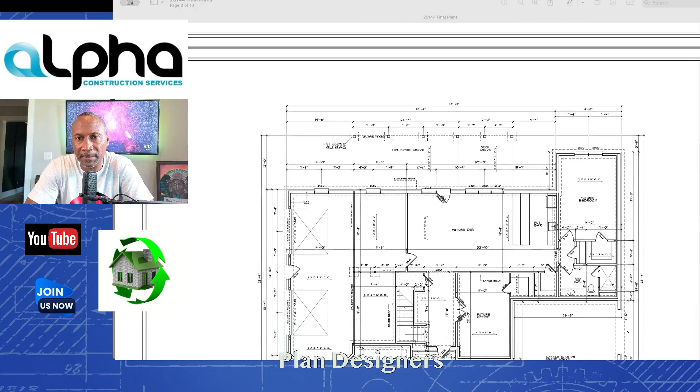We tweaked it a little bit more to make it usable, but everything else, we've actually been through the house. We know what it's going to look like. This house has been built several times before I built it the first time. I know how everything's going to lay out in this home. If we go here, the footings and things of that nature, man, I can see this stuff, man.

There's no guessing, guys. You can probably see it right here — this guy's giving me the directions, because in most cases, we're going to do dimensional flooring, dimensional lumber, because we're trying to save costs. If you do engineered flooring, you're probably another $7,000 to $10,000 more. But I'm trying to save that homeowner a little bit. I can go to regular dimensional lumber — that's been proven to work for years.

Now, if we want to just switch over to an engineered system, we can. But here, it makes it much easier for everybody. When I send this to my lumber guy, he already sees the directions of the joist spans. They don't have to guess about this stuff. Because my joist layout — this guy's telling me which direction the joists are laid out.

Which also, as a builder, I have to go check the code to make sure he got that right. But when you send this to the next guy, your lumber supplier, they don't have to try to figure out or engineer which direction your joists are going to go in and all those things. They kind of already know where it goes, in the event that I'm having it engineered. And then they can do their red line set of plans off of these plans.

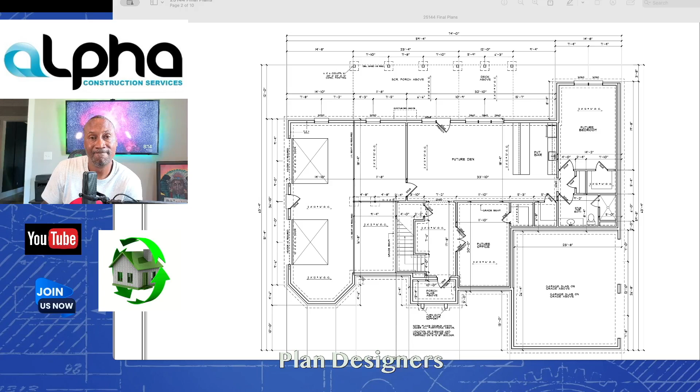This is basic, guys. We don't have a lot of color. I mean, even on the front of this right here, guys, there's none of these pictures making it look pretty and stuff. No, just black and white, man. This is all I'm dealing with. And guys, builders are very direct, man. We're straight to the point. This is what we want to see, guys.

And as a builder, I mean, I can see all the footings. He tried to give me as much layout as possible without making it too confusing. He gave me all the callouts. Guys, you can kind of see in some cases right here all the little lines we got here — he's trying to call out the dimensions and things right there, and then he pulls them to the side.

This is what we want to see, guys. I mean, we can see what the footings are going to be, what the grade beams are going to be, what the piers are going to be. You can see the steps, the direction you're going to go in when you're going up the steps. Just very basic, man — we're not trying to get overly complicated. Like I said, guys, if you got me a set of plans with a bunch of colors and pictures and stuff like that, I really don't want to look at all that stuff.

Here's another thing, guys. Let me see — so this is the first floor plan. As you see here, we got coffered ceilings in here. Same thing, guys — not too complicated, but he does give me the joist layouts. I know which direction those joists are going to go in.

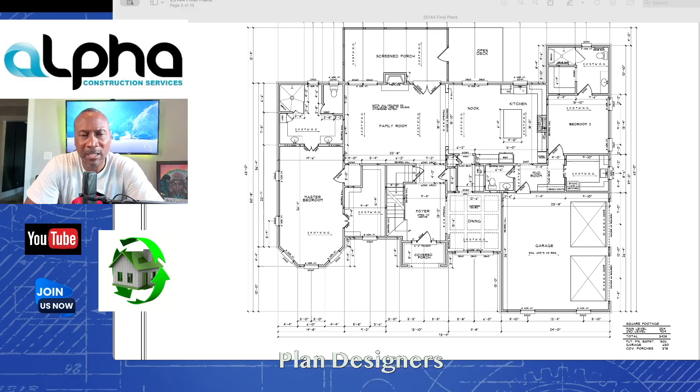So then I can go through, before I even quote this job, and make sure that I understand which direction these beams are going in, or these flooring joists and things of that nature are going in. I can see where the girders are going to be. You go in the basement, you can see where you're going to put the girders in this job right here. So we got girders here.

We can see all these girders, pier beams. It's very simple to me.

Another thing we want to look at, just basic right here. He gives us the details of the square footage that we're going to be dealing with.

See what else? That's one thing. Another thing we're going to be looking at too, guys, these are the elevations. He's doing a call out of all the different material that's going to be done on the house.

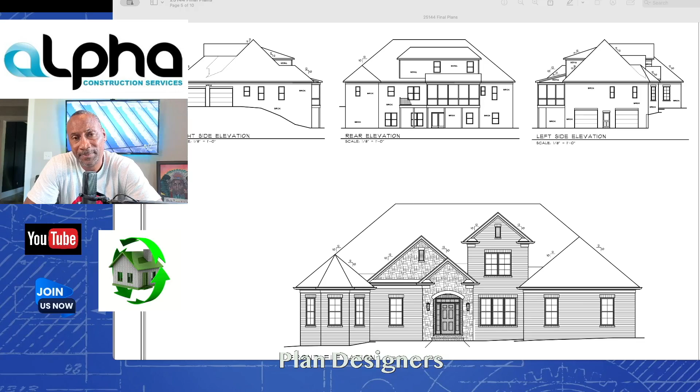This makes it very, very simple for me to upload this information into my estimating software. It's easy for me to upload this PDF file. It just makes it really easy for me to do my job.

He put the electrical layout on a whole other page so you don't have all those electrical lines confusing us. This is what we want to see, guys. Very basic. Then you get down to the electrical plans.

A roof layout is always good so you know what pitches you're going to have on that roof. He called out all the pitches. That makes it really easy for my framers when we get out there and start doing work.

When you see stuff like this, guys, it allows me to hold everybody accountable. I can hold these guys to it - hey man, you got this pitch wrong, or this pitch is less than 2-12, so you got to make sure you put the ice and water shield or another underlayment under that roof.

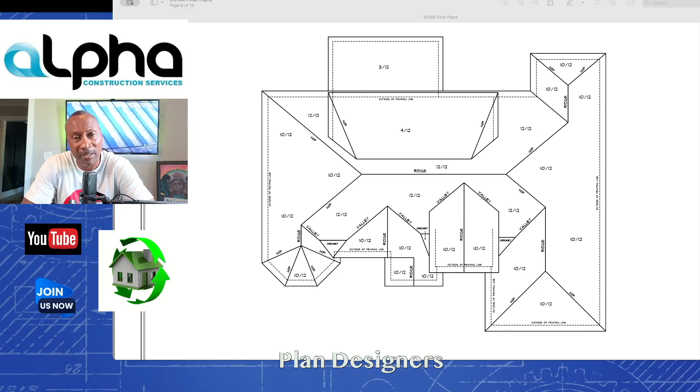These are the things I'm looking at, guys. And here's another thing we want to see - I want to see wall sections and details.

This is it. This is all I need to see, guys. I don't need anything else. To be honest, I don't really even need you to do me a plot plan. I don't need to see a plot plan. I do my own plot plan because we don't know what we're going to deal with in residential, guys.

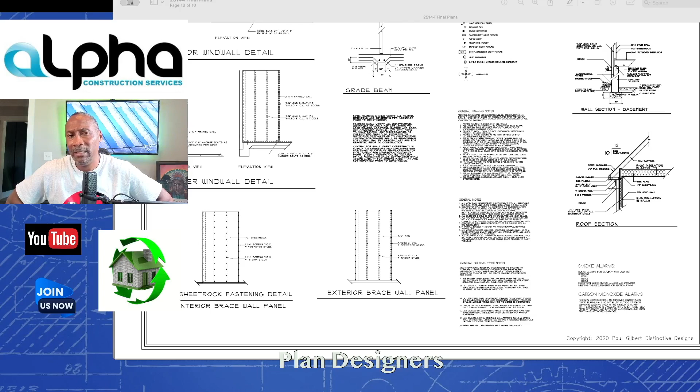In residential, we're not going out here doing a geo observation or something like that, where we spend $20,000 to figure out what the ground is. You're not going to spend all that in residential - that's almost a massive portion of the cost of the house.

We're going to go out there and start digging, and get a plan on the front end - this is how the house needs to set. We're going to make sure we got enough room for the turnarounds so that when the homeowner's moving in and out of their house, it's comfortable for them when they drive into the garages. We're going to make sure all that is good.

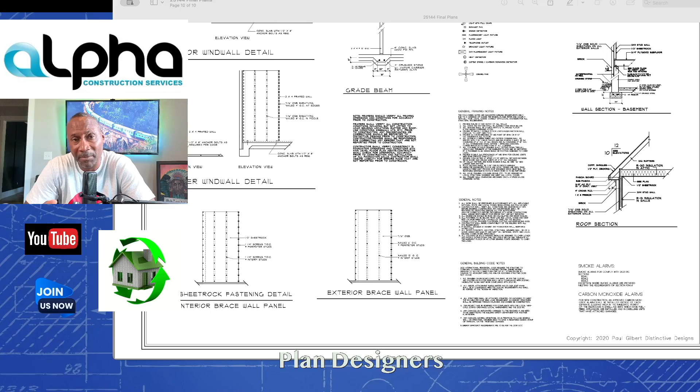So I don't need all that plot plan stuff, guys. But this is what the builders want to see. That's it - we don't want to see a lot of stuff. This is for residential now.

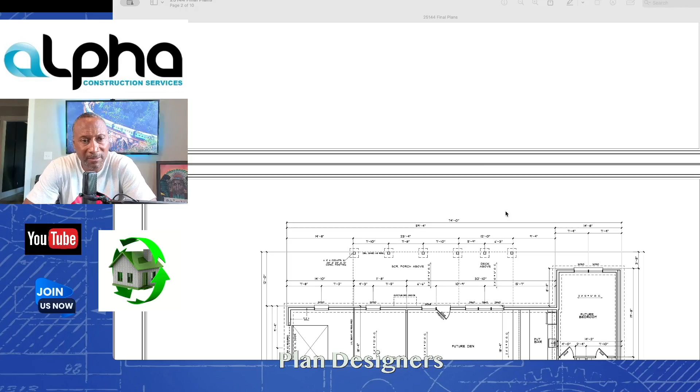For commercial, maybe a little bit different, guys, because on commercial - and this is the architects - they're going to need to see everything. They're going to need to see the mechanical layout, the electric, the plumbing layout, plumber schematics and things of that nature. But on residential construction, guys, this is all I need. This is it.

And here's another thing, man - you can't take a set of residential plans and design that stuff like you would do commercial, because there's products and materials that are common in commercial that are not common in residential, and vice versa. And if you take a lot of that commercial stuff and try to put that into residential, it's going to put you into a cost that's just not affordable.

And people say that - I don't even care, I've never met a homeowner or Elon Musk who isn't going to want to know cost. Millionaires want to know cost.

Matter of fact, that's how self-made millionaires become millionaires - because they don't deviate from costs. They got to know their costs. So people can't just say, well, we got enough money, we can do what we want to do. No, man, cost matters. And if it doesn't matter to you, it matters to me.

I'm not going to sit here and get you guys into a financial bind because I didn't have an idea of the cost, or are we just going to build this house and whatever happens, you guys going to pay for it? Then we get out here and we can't finish the house. That's not good for me, nor the homeowner.